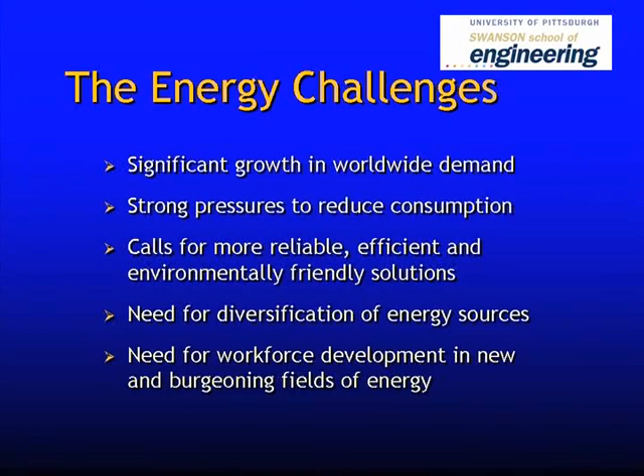There's calls for more reliable and friendly solutions for generating energy, and there's going to be tremendous strides made in reducing the energy consumption in various entities through green buildings and electrical production efficiencies and transportation efficiencies. And there'll be new energy sources developed, such as wind power and solar power. So there's a lot of challenges, and the gas from shale is going to be one of the solutions to the challenges that exist.

This just shows the energy consumption throughout the world, and you can see that fossil fuels, that's coal, gas, and oil, will continue to be the dominant source of energy for the next 30 to 100 years. And these are the projections that the federal government has put out of what the consumption will be. And this is after all of the efficiencies that are generated are taken into account. So it's not what will happen if we don't do anything. This is what will happen if we really focus on developing optimal energy use.

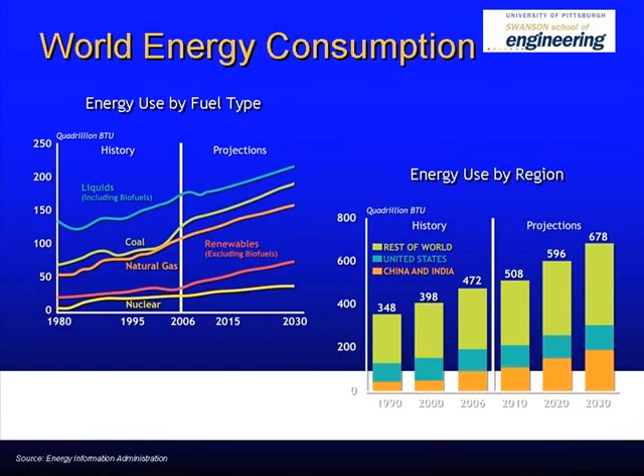And you can see where the demand is coming. China and India are resulting in big increases. The rest of the world is going to demand more and more energy, and so it's a very important factor of why shale gas is important.

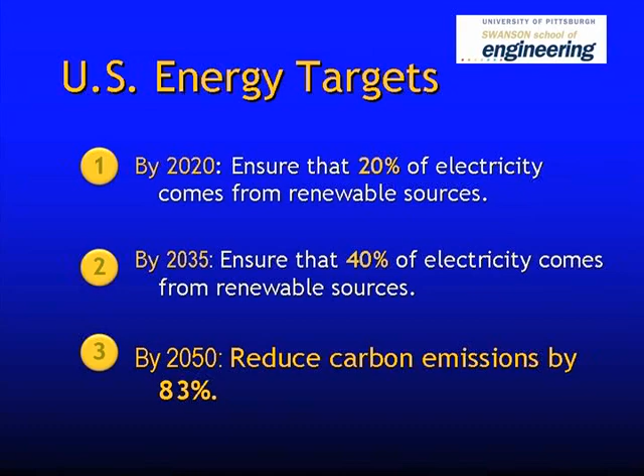And if you look, one of the U.S. energy targets is to reduce carbon emissions by 83%. So if you recall what John said, when you burn methane as opposed to coal or oil, you have a dramatic reduction in the carbon emissions, because as a fuel, methane has much less carbon per unit of energy than the other two. So that is why there's a desire, when you're going to use fossil fuels, to use natural gas in preference to the others.

Now, there's other factors that make things desirable, like convenience. Using natural gas in cars is not that great right now because of many issues, and the cost of coal is much less than other fuels. But the goal that's set by 2050 is 83% reduction.

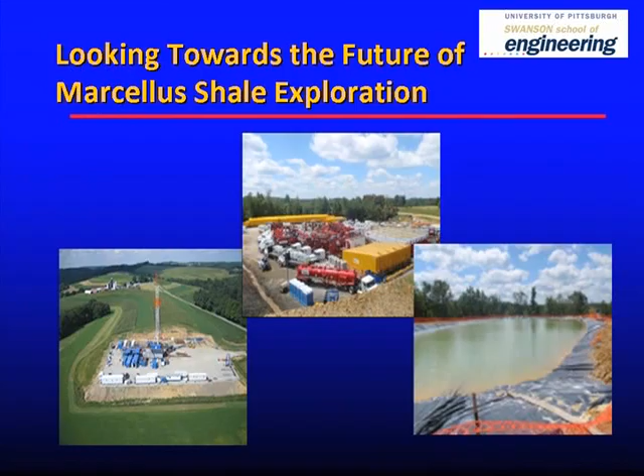So this is a Marcellus Shale exploration and drilling site, just showing you some of the issues. You can look at this, the impact of the site itself, the presence of trucks, the water issues. All of these will be discussed during the presentations this afternoon.

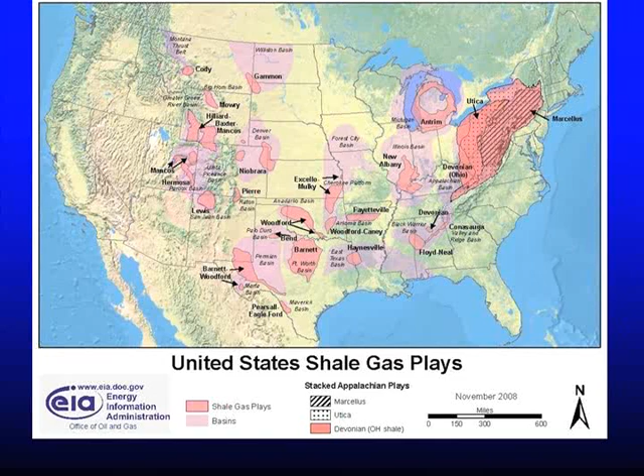Here's where shale gas is. These are called shale gas plays. You can see there are many across the United States, but the most significant that's contributing today is the Marcellus Shale, which is basically, the way I describe it, centered in Pennsylvania and extending around to the surrounding states, but it's a large site.

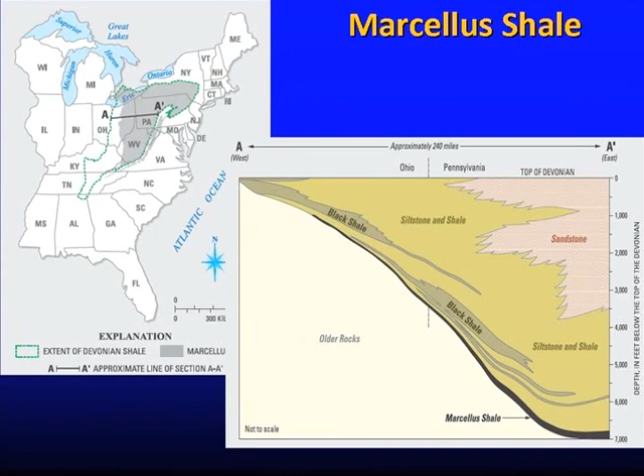And underneath the Marcellus Shale is something called the Utica Shale, which has not been developed at all as of yet. And you can see this is the Ohio-Pennsylvania border, and you can see the Marcellus Shale. It's thicker as you get more into Pennsylvania and thinner, but more shallow as you go towards Ohio. And this is what's being developed for natural gas, particularly in Pennsylvania.

And you can see the various depths, how the depth changes. The depth of the Marcellus Shale base is 2,000 to 3,000 feet on the northern side, and then as you go south, it gets deeper and deeper up to about 9,000 feet. And one of the reasons this is significant is because the aquifers that are associated with the shale, and which have been of concern, are usually at dramatically different depths. And I think you'll hear a little bit more about that.

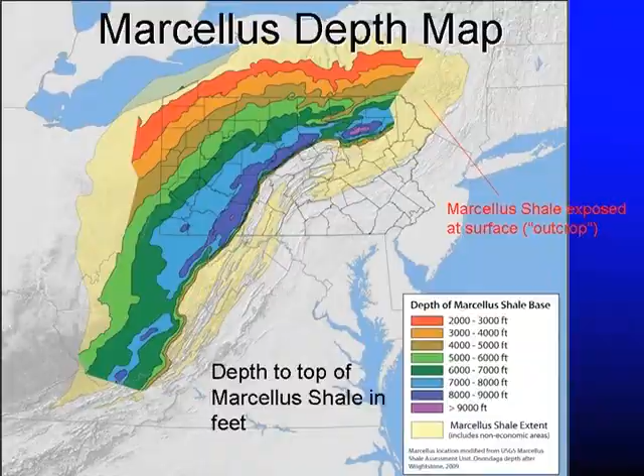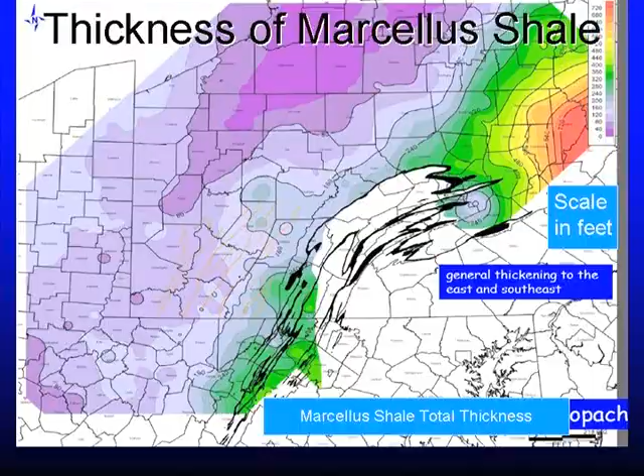So we're going to hear about the specific technology of production of gas from Marcellus Shale. So I'm not going to go into a lot of detail, but I'll give an overview of what's going on. Basically, it's a site where wells are drilled down into the shale, and then you have to fracture the shale in order to get the gas to come out, which means you turn it from impermeable rock into permeable rock by hydraulic fracturing. Then gas will flow back up, and it'll be produced like gas is in any natural gas well.

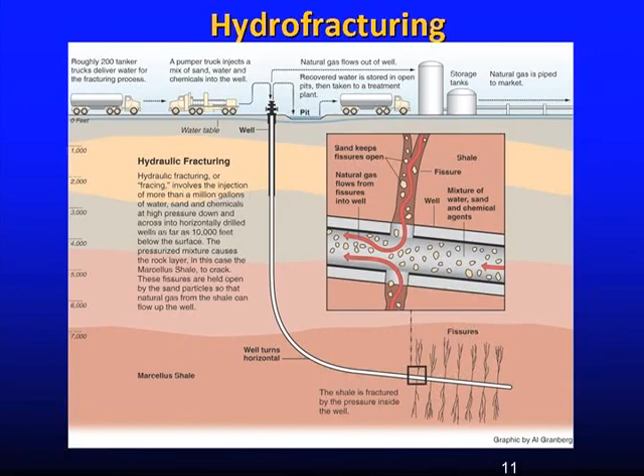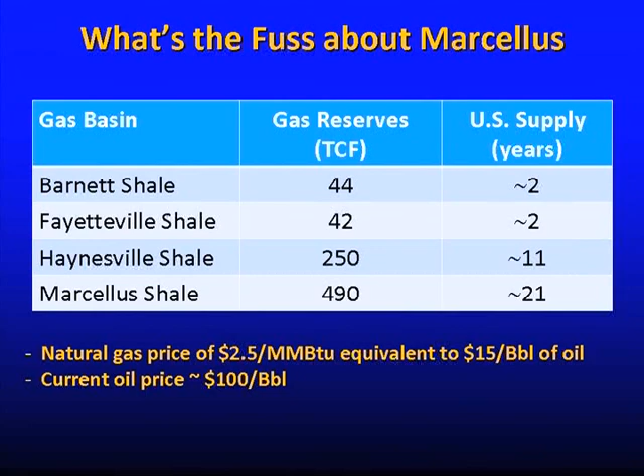The main reason why Marcellus shale gas is so important is not only because methane is an environmentally friendly fuel compared to others, but that it's a huge amount of gas. It's estimated at 490 trillion cubic feet. That's a 21-year supply of the U.S. demand. So it has a huge potential to meet the needs of Pennsylvania, which can become the second largest gas producing state in the nation behind Texas. Now I think it's about 15th.

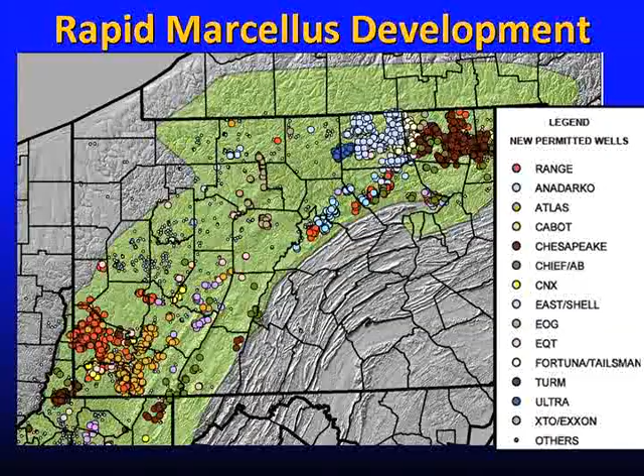So it has a chance for that, but also it will lower the price of energy, and it will impact the economy in the regions where the gas is produced. And I'm going to talk a little bit more about that. Here you can see the permitted wells in Pennsylvania. There's a lot of discussion about should we be permitting wells or not, but the truth is there's thousands of wells permitted. They're producing lots of gas, and a lot of people are employed because of the Marcellus shale gas.

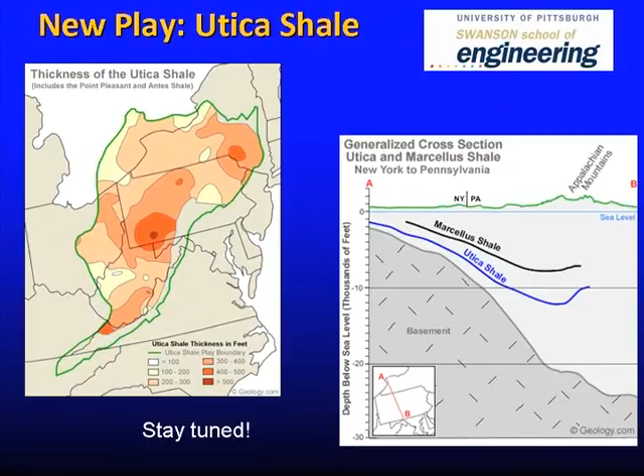And as I mentioned, the Utica Shale, which is another shale play underneath the Marcellus Shale, is even bigger and potentially contains more gas. And so if this is produced, it could have an even bigger impact than Marcellus Shale, but we'll have to stay tuned to see what happens there. I think by the time they get to Utica Shale, some of the issues associated with hydrofracking and disposal of water and so forth will have been addressed.

What are the water issues? We'll hear about that. The water issues are that you need 3 to 7 million gallons of water for hydrofracking. So that's a lot of water. You're withdrawing water from the surface, so you're consuming water from a river or stream. The water contains a lot of additives when you inject it, and it contains even more minerals and things when it's produced.

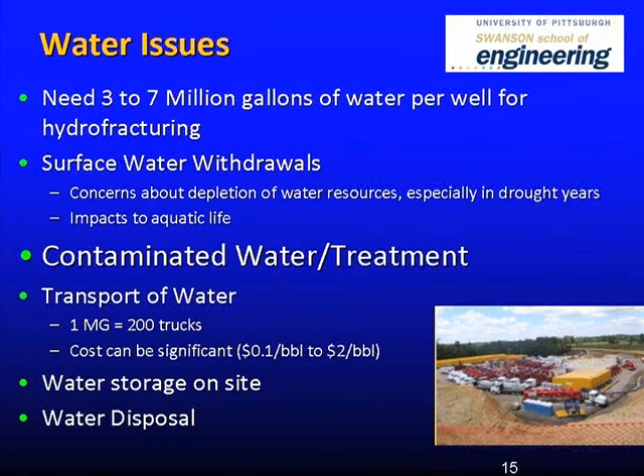So it's an environmental issue, and you have to learn how to deal with the problems associated with the environment. You have to transport the water, so it requires trucks and movement of trucks across roads in the region of the wells. And you have water storage issues on site. How do you store water on site? Because you need millions of gallons. You have to have a way of storing it, and you have to protect the environment around there and restore the environment once you're finished.

And then water disposal. At some point in the Marcellus shale cycle of hydrofracking and drilling, you have to worry about what you're going to do with the residual water, and that's a disposal issue. So I'm not going to talk about all of these, just to mention that's one of the things that's affecting Marcellus shale. I just have one slide that addresses one of these issues just for illustrative purposes.

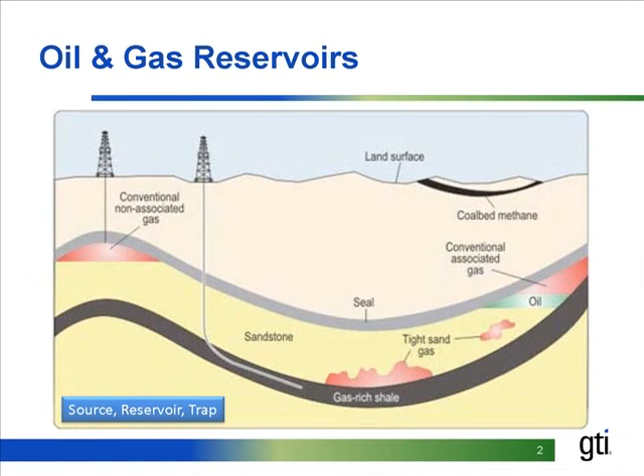So the reservoirs that I mentioned, the beach sand reservoirs, which are the Saudi reservoirs or the Gulf of Mexico, are these right here. And these reservoirs are really drying up really fast. There isn't very much of what's called easy oil and easy gas. So there's a need now to extract gas from these gas-rich shales. All the hydrocarbons that you find in these nice, clean sand reservoirs are all generated in these gas-rich shales.

And because the porosity in these gas-rich shales is so low, you actually have to expose a lot more of the rock to the wellbore in order to produce the gas or the oil or whatever hydrocarbon in economic quantities, whereas these other conventional reservoirs are much easier to produce. And the biggest difference between the gas-rich shale and the conventional reservoir is that it is the source of the hydrocarbon, it's the reservoir that is holding the hydrocarbon, and also it's a trap. So you have all three phases that occur in a shale.

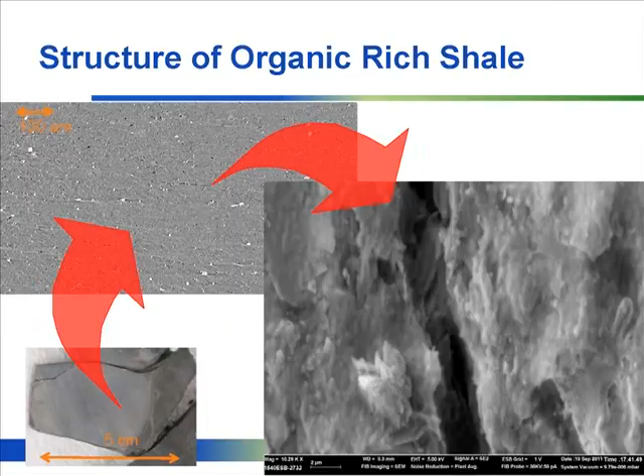When you zoom in to a scale of about 100 microns, you start seeing there are little discontinuities in the shale. You start seeing different minerals and different things happening. And when you zoom into this little fine hairline crack there, on a scale of about 2 microns, you can actually see that, in fact, this shale does have porosity. It does have some fine hair-like fractures, and this is where actually the hydrocarbons are contained.

Again, it's not very much pore space to house the hydrocarbons. That's why so much shale has to be exposed, and that's why hydraulic fracturing is needed to break apart the shale and create more of these fissures and fractures to let the gas out of these pore spaces that have little or no conductivity.

In addition to being a very tight rock, there are 2 different flow mechanisms in a shale that allow the hydrocarbons to flow out. Methane is stored in shales in 2 ways. One, it's encased in the porosity, and 2, because this organic rich shale has organic matter, the methane molecules are actually adsorbed to the organic matter of the shale.

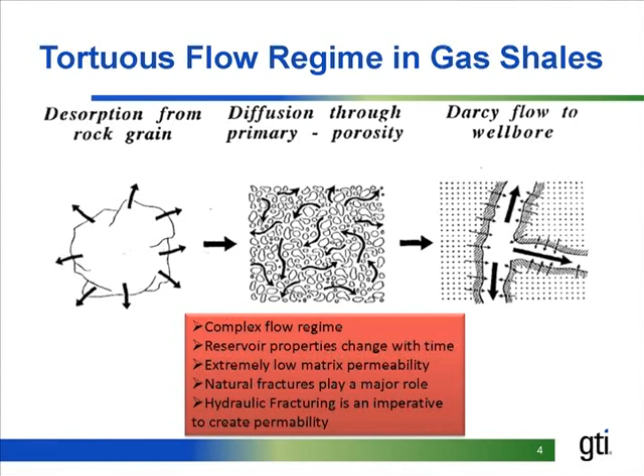And the only way to get the methane that's adsorbed to the organic matter from the shale to flow out is you have to reduce the pressure. So once you desorb the methane from the organic material, it goes into the porosity, and then it goes into these fractures that you created through hydraulic fracturing, and into the wellbore.

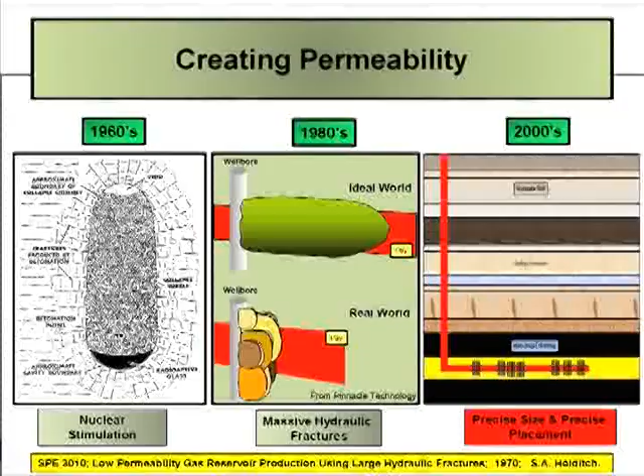But there has to be some kind of synthetic permeability that's created in order for these things to flow. And this is where hydraulic fracturing comes in. And hydraulic fracturing is based on creating permeability. Creating permeability in these reservoirs is not really new. It's actually been around for a very long time.

In the 60s, the government and industry experimented with nuclear detonation to create permeability. They would actually convey a nuclear bomb of some smaller scale, detonate the bomb, and see if there's any hydrocarbons that were trapped in the rock that would come out. Well, it didn't work. The rock was destroyed, it created glass, and in the end, you had to deal with radioactive material.

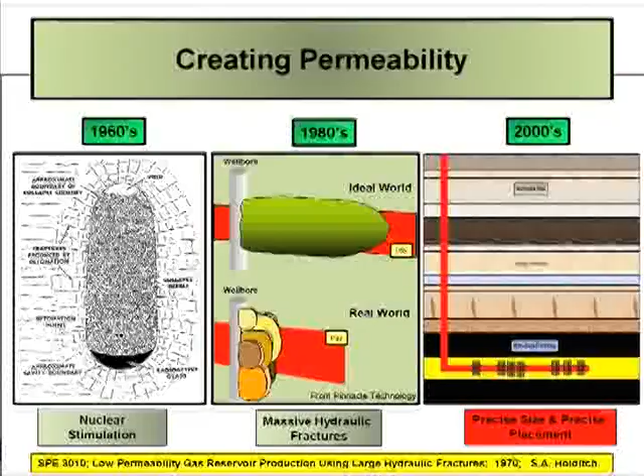In the 80s, these massive hydraulic stimulation treatments were thought to be the ideal way to go about releasing the gas from the rock. And in the real world, it turned out that these massive treatments didn't really extend out as far into the rock as we thought. Instead, what happened is that a lot of these little smaller fractures were created, and it didn't stimulate the reservoir, the hydrocarbons, very effectively.

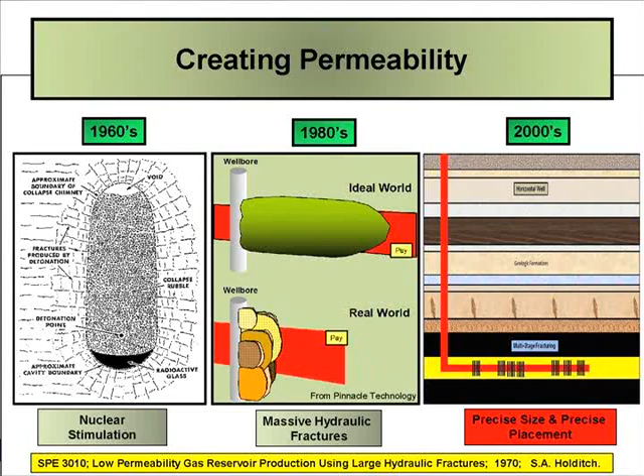And this is where horizontal wells and hydraulic fracturing are making a difference now, and for the last 10 years, actually. So what you have is a horizontal well in the formation that contains the hydrocarbon, and you fracture stimulate this horizontal well a few times, and you break the rock apart, hence you get gas out of the rock that normally wouldn't flow gas.

Here's a quick timeline on hydraulic fracturing. This technology is actually fairly old. It's been around since the 1940s. The first one was in the Hugoton field. And the volumes were really small back then, around 1,000 gallons of fluid. As it evolved in the 50s, 60s, by 1965, there were 400,000 treatments executed. By 1975, there were about half a million, and so on.

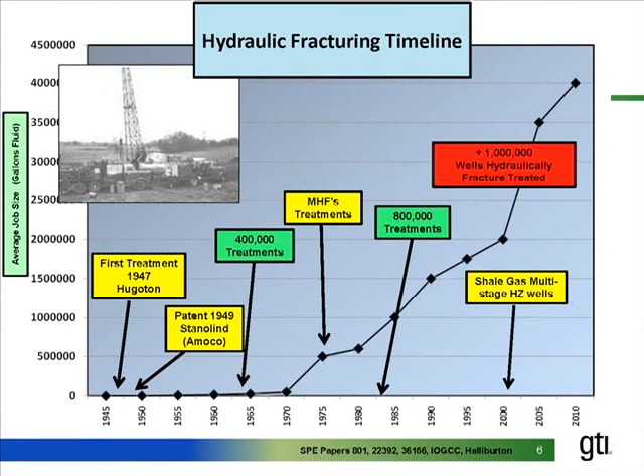In the early 2000s, with the development of the Barnett Shale in the Fort Worth, Dallas area, this is where the horizontal wells with multi-stage hydraulic fracturing really took off, and the volume of the fracturing treatments really increased. And nowadays we have over 1 million wells that have been fracture stimulated. And if you think about it, each well sometimes can have up to 20 or 30 fracture treatments. So there have been plenty of hydraulic fracture treatments that have been already executed.

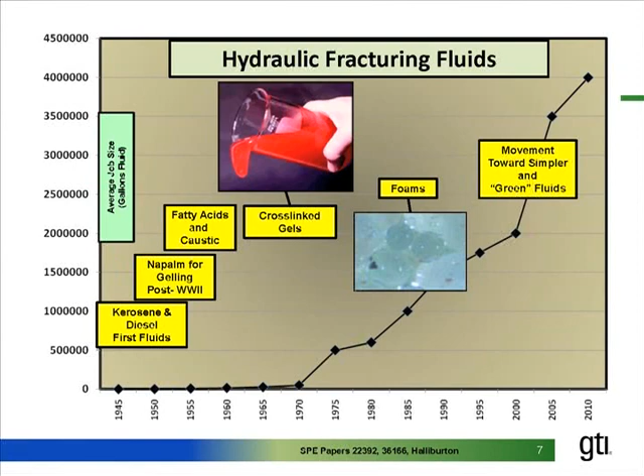So again, the point is that this technology is not new. It's been around for a long time, but it's been evolving over the years to make it what it is now. The hydraulic fracturing fluids that were used initially were kerosene and diesel fluids, then progressed to napalm, fatty acids, and caustic. And it wasn't until the crosslinked gels came out about 1970 that hydraulic fracturing became what it is now. The reason for the crosslinked gels: you take a base fluid like water, you add a gelling agent that viscosifies the fluid, and then you're able to put in a propping agent.

This propping agent is what actually keeps these microfractures that you create open. So once you pump the hydraulic fracture, you put something in there like a sand or a synthetic material, and then once the well begins to produce gas, the fractures that you created now close on the propping agent and stay open.

And as fracturing evolved, the fluids became cleaner, more refined, more fit for purpose, and the fluids nowadays used for fracturing in these shales are really, really green. And what I mean by green is that most of the additives that are put into these fracturing fluids are contained in all the household products that you can think of.

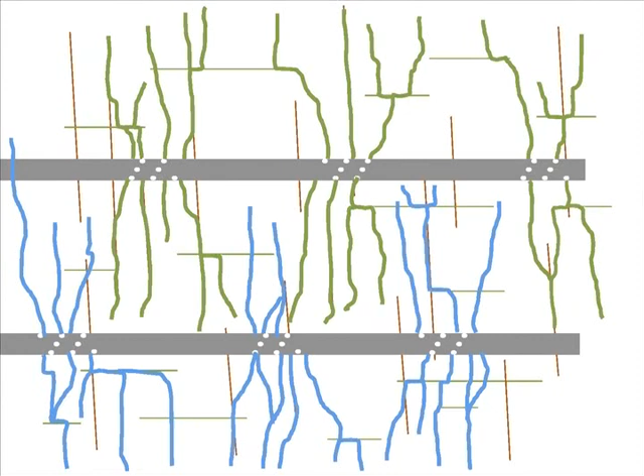So I made this animation to try to visualize what these hydraulic fractures are doing relative to what else is going on in the formation. So what you see here is a plan view looking from the top on 2 horizontal wellbores that are parallel. These brown and green lines are natural fractures that are already in the rock. For the most part, every rock has some kind of a natural fracture in there that's been created through tectonic movements and changes in stress.

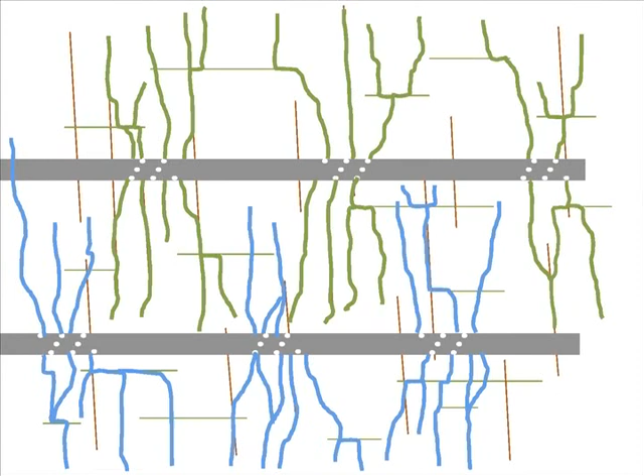So as we pump these hydraulic fractures, let's say in this first wellbore up here, the fluid goes out of these perforations that I just showed you. These hydraulic fractures connect up with the natural fractures, and now you have this network of, for lack of a better word, shattered rock, where the rock previously was a solid piece that nothing would flow through.

And then this is a little bit more advanced concept in fracturing, but there's also a way where you can actually optimize these treatments if you do what's called a zipper frac. So if you frac the first wellbore, you induce these hydraulic fractures. There's actually a stress field that changes, and then when you fracture the second well, the fractures that are generated should not come in contact with these first fractures, and therefore you should get pretty good coverage of the rock and stimulate the entire rock mass that you're trying to extract the hydrocarbons from. How far apart would those be? 500 feet, 1,000 feet.

Let me give you a little bit of background on the current project that I'm working on in the Marcellus Shale. We have what's called a 7-well pad, and we have 7 horizontal wells that are drilled, of course, side by side, and these wells are drilled from a single pad. So the pad is no bigger than maybe an acre of land, I guess, once it's all said and done. So the wells are drilled from a central location.

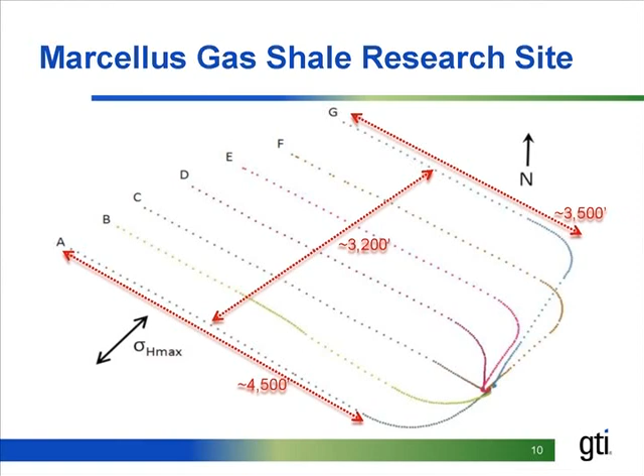The spacing in these wells is about 500 feet apart. This is a plan view, of course. The depth of these wells is about 6,500 feet, and you can see the length of the laterals, with this one being about 4,500 feet to about 3,500 feet. So these wells actually go out really far laterally. It's pretty amazing that they're able to drill a lateral well that far out.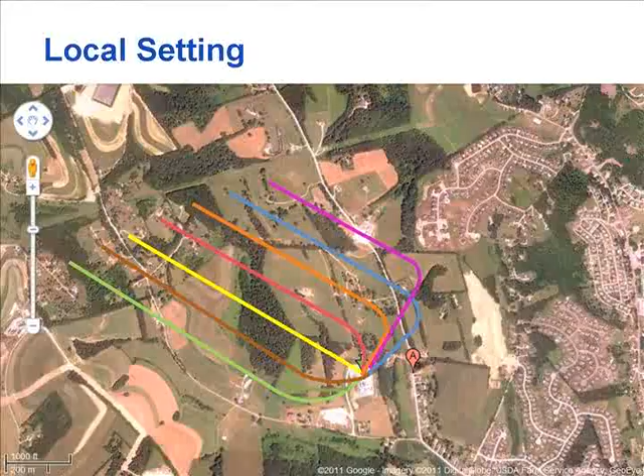What's more important about this is the setting of where these wells are at. This is actual, to scale, a plan view of the wells overlaid on top of the local setting. This is in a rural, very populated area. It's actually a little bit hilly, and it's very important that the environment and the people and the quality of life is taken into account when developing these wells in an area like this. So it made a lot of sense to drill these wells from a central location to limit the amount of land that's being used and things like that.

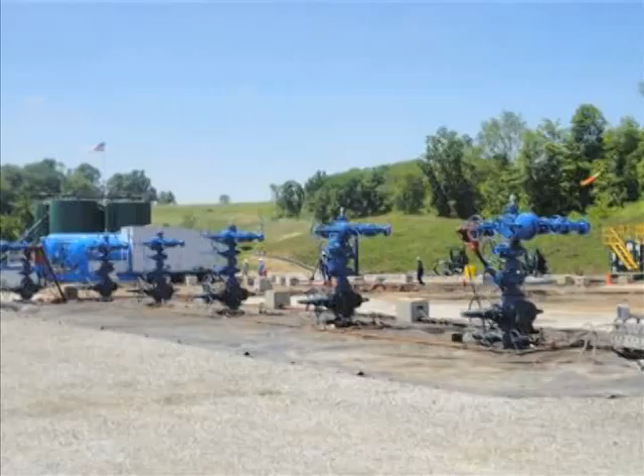So that's what it looks like. And this is actually what the surface looks like. Again, what you see are the well heads. Each one of these is actually a gas well, and there's 7 of them here. So the other option, if you didn't drill these wells at a central pad, would be to drill each well on a separate pad. You would have to build a huge pad to get the drilling rig in there, the water pits and all that. So this actually saves a lot of land and a lot of changes to the environment.

So you might ask yourself, how does the industry know where these hydraulic fractures go? Because we can't see underground. Some of these wells are 3 miles deep in the earth. There's actually a way to monitor which direction and how far these hydraulic fractures go, and it's done with microseismic imaging. Every time you crack a rock, or even when you drop a rock from your hand to the earth, you actually generate an earthquake. Granted, it's a very, very fine earthquake that you can't feel, but there are instruments called geophones or accelerometers that can actually detect these very fine earthquakes.

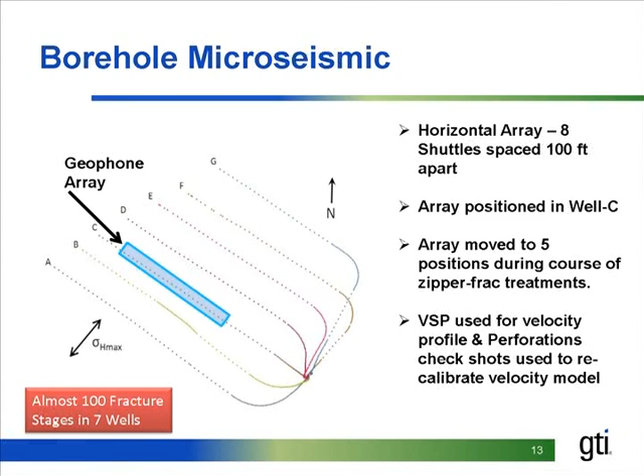And the industry uses those in 2 ways. One, they set up a surface array with these very fine instruments, and as a crack is generated 2 miles under the earth, these instruments can pick up a tiny signal. The other way is to put these geophones in a well bore, like here. So as you're fracking the other wells, there's a listening device in this well bore that picks up where these fractures are going. Here's the example of the surface array, and on this project both have been implemented to get a good feel of where these fractures are going.

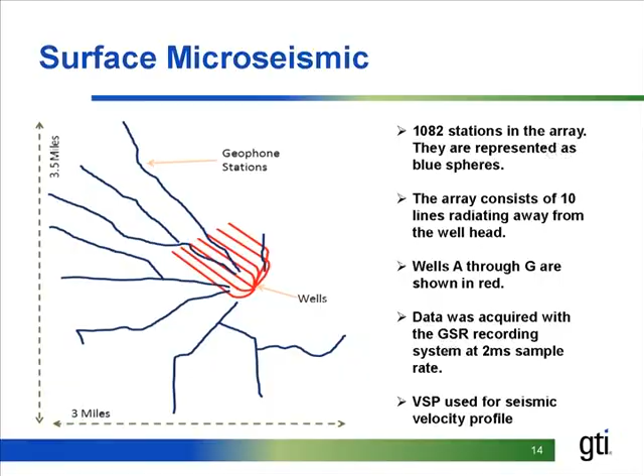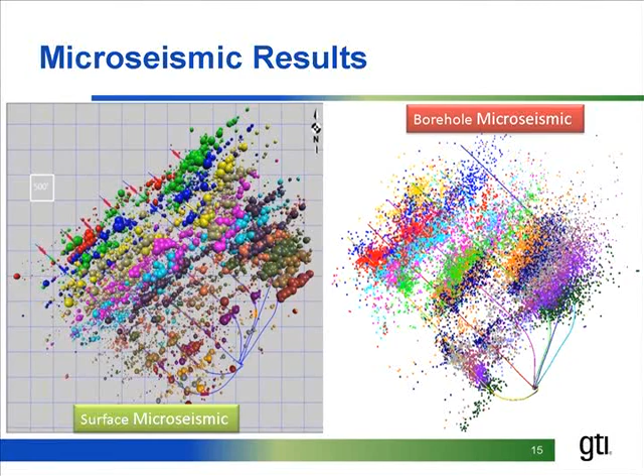Again, here are the 7 wells that I showed you earlier. Here's the array of the surface geophones that extends out from the center of this pad. The array includes over 1,000 accelerometers that are put into the ground that listen for these micro earthquakes to see where this hydraulic fracture goes. Okay. And here is the end result. Each one of these dots is a micro earthquake that shows you where the fracture is going. If I may just take one more minute, I have a movie that I want to show that shows this in real time.

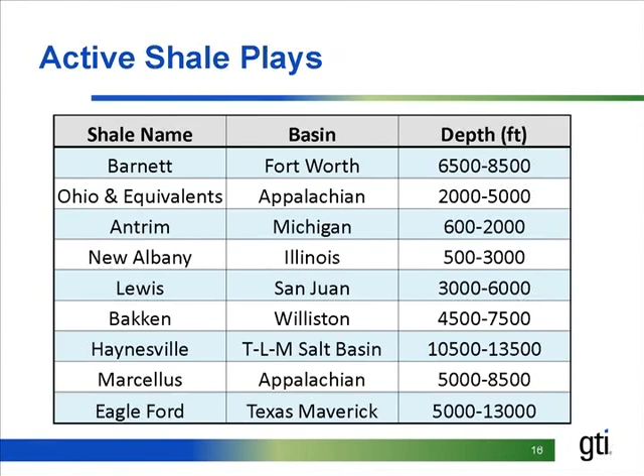Like Dr. Holditch mentioned, these shales are all over the states. They're at different depths in different basins. The Haynesville is one of the deepest ones. The shale is actually between 10,500 and 13,500 feet. There's a New Albany shale here in southern Illinois that's fairly shallow, about 2,500 feet. So the shale is everywhere, and there's a lot of gas there. Okay.

Okay, so here's the 7-well pad, or the 7 wells, and what you see are the hydraulic fractures propagating from this well. So this well right here is being fractured. As the well is being fractured, microseismic events are being generated from the cracking of the rocks, and there are listening devices in this well right here that are picking this up. As you can see, as the well is being fractured, more and more events are being picked up.

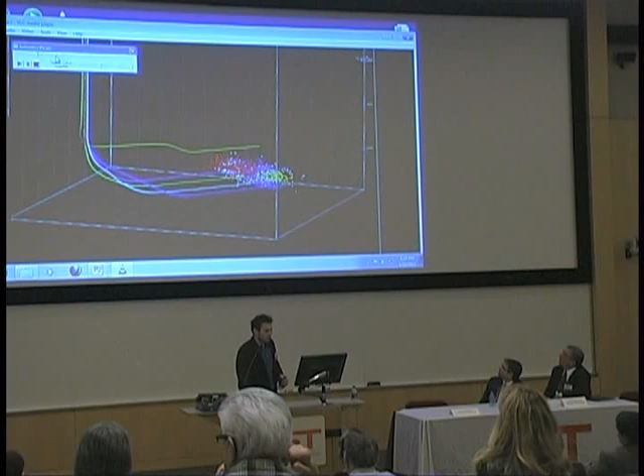And this is actually the permeability that's being created. It's a shattering of this rock that releases the hydrocarbons and provides a path for the hydrocarbons to flow to the wellbore. And when you speed this up a little bit, you'll see more and more of the rock space being stimulated.

Pause right there. So you can actually see how high these fractures propagate. This depth here is 6,500 feet. Here's about 6,000 feet. Here's about 7,000 feet. So these events don't go higher than 500 feet above where they're intended to be.

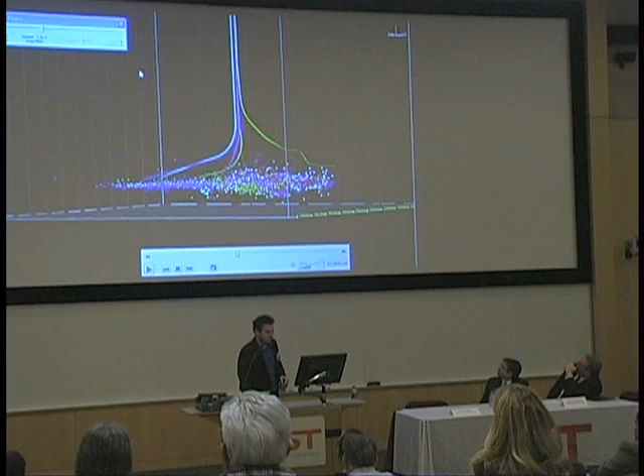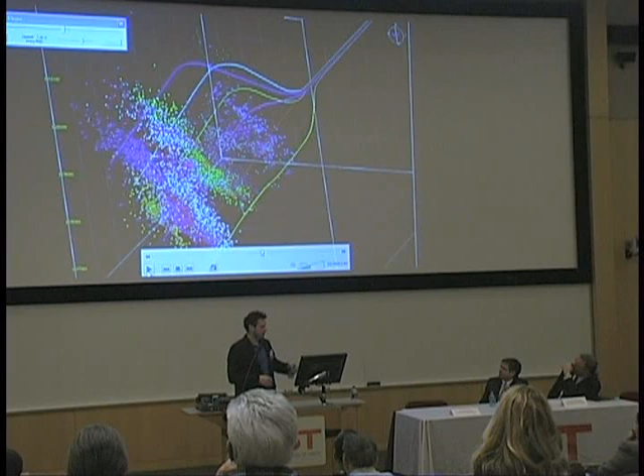Here's the general coverage. And one point I want to make before I hand it over to Trevor. What you see here is that all these wells were fracture stimulated. However, in this area, you see very good coverage of microseismic events, meaning that this area was stimulated really well. Here you see a void.

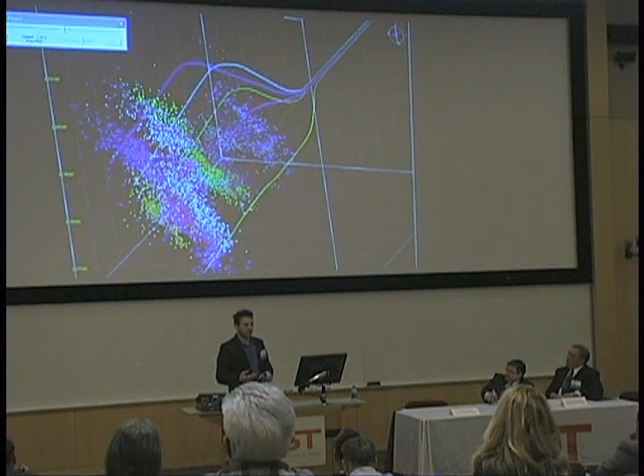And this is actually where a lot of research is needed to understand why some hydraulic fracture treatments are effective and why some aren't. Because if the treatment isn't effective, then you're actually leaving a lot of gas behind in these unstimulated areas here. So that's actually what we're working on right now, trying to understand how this works and how to optimize these fracturing treatments to better utilize the rock that's there and not have to go back in the future and redo it.

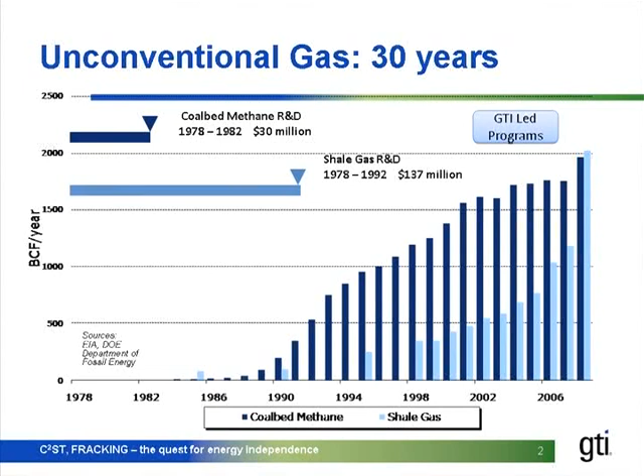So GTI is a 70-year-old organization. We've been working with producers and service companies and technology providers in unconventional gas development for 30 years. And as you can see in this slide, GTI led the early research and development programs in coal bed methane and shale gas in the US from the late 70s to the early 1990s. These were very sizable programs totaling about $170 million. These programs led to the scientific and technological innovation that is utilized by the industry today to make these resources economically producible.

And I think this slide is relevant to what we're talking about today because although the technology for unconventional gas development has been developing for over 30 years, the public and stakeholder communities have only been introduced to this technology very recently. And so what I think is critically important now, if these resources are going to reach their full potential, is the societal acceptance of the technology and the sustainable development of these resources going forward.

But of course, society's reaction to these resources so far has been mixed, to put it lightly. Not everyone's very happy about the development and the increase in shale gas production. There have been numerous objections raised by Oscar-nominated movies such as Gasland, New York Times feature articles on hydraulic fracturing, and local protests from high-profile people like actors like Mark Ruffalo.

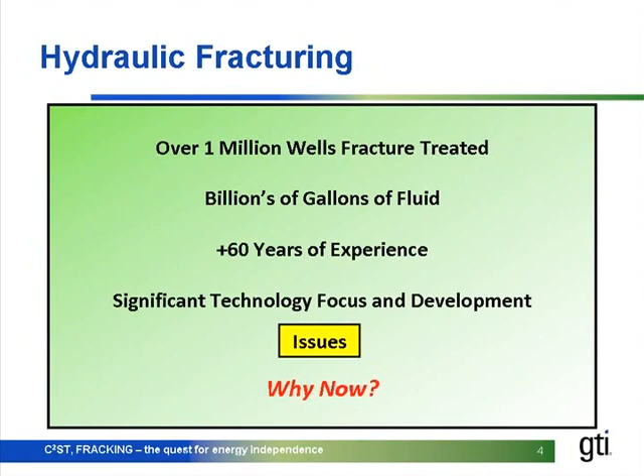But as we heard Jordan and Dr. Holditch talk about, hydraulic fracturing has been applied for over 60 years, and there have been over 1 million hydraulically fractured wells. The industry knows that they can develop these resources responsibly and safely. They know the technologies are proven. They know that unconventional gas has and will continue to provide economic and environmental benefits.

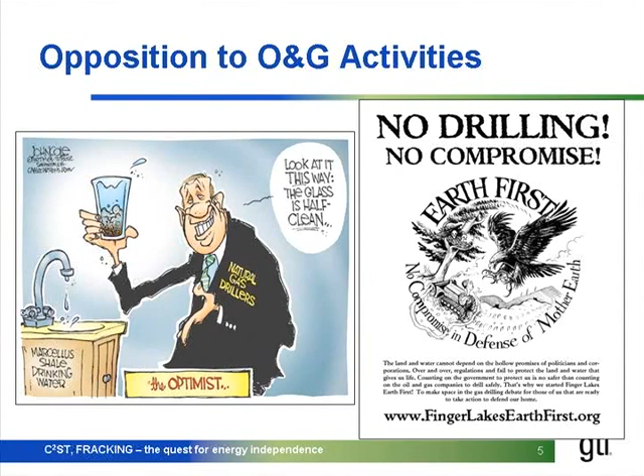But to those outside of the industry, these technologies appear new, they appear novel, untested, and some would say even dangerous. And so a harsh spotlight has been shined on the industry's operating practices. And the industry has been slow to respond with the appropriate information and transparency that I believe provides the needed environmental assurances. And I think it's because of the perceptions of environmental impact and because the technologies have been very disruptive to the energy market, particularly to the further development of renewable energies, that opposition groups have organized campaigns against it.

There's been a lot of emotional rhetoric and accusations generated about the technologies used to develop unconventional gas. And this has resulted in a lot of confusion, and people just don't know what to believe, and they don't know who to trust. They don't want to trust the government, and they don't want to trust the industry. In my view, what enabled the confusion was the lack of information when it was desperately needed very early on in the process.

There was a significant increase in drilling activity closer and closer to where people live and work. And yet, information was not made available about the science behind the technology. Worse still, the industry chose to downplay concerns and to dismiss the concerns of the public. And I think what they should have done is engaged in more authentic listening to understand what the concerns were and to come forward with information that would have been helpful. But in the absence of good, credible information, people are going to make up their own minds.

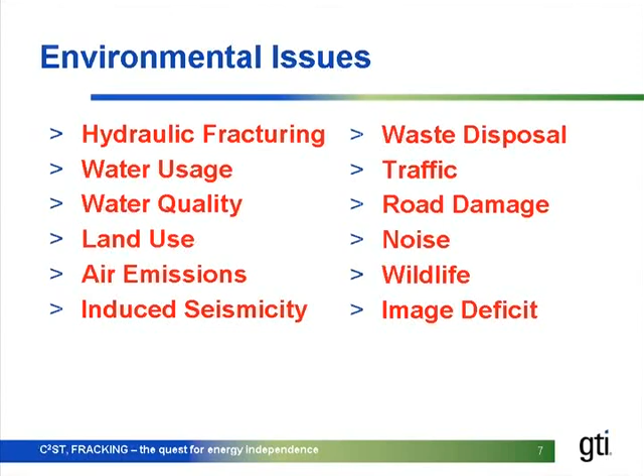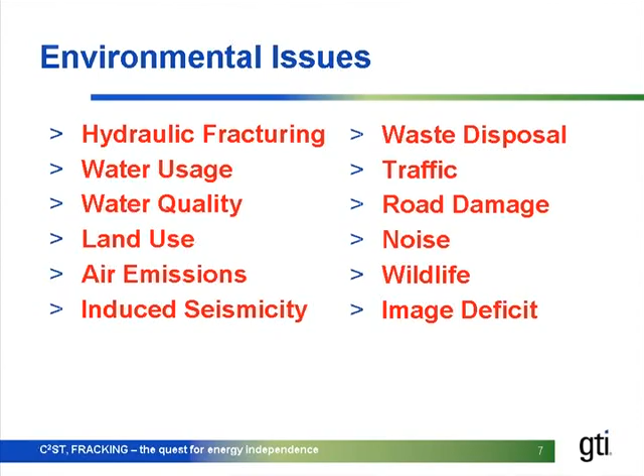So while scientific and technological innovations will continue to play a key role in unconventional gas development, and the economics and the energy security issues are important, I believe it's going to be the environmental issues, both real and perceived, and the acceptance by the general public that will determine the extent to which unconventional gas resources will reach their full potential. Now, hydraulic fracturing and water management are obviously at the core of environmental debate, but it's not just about hydraulic fracturing. There are a number of environmental impacts that the public sees, that include land use, air emissions, induced seismicity, waste disposal, traffic, road damage, noise, wildlife.

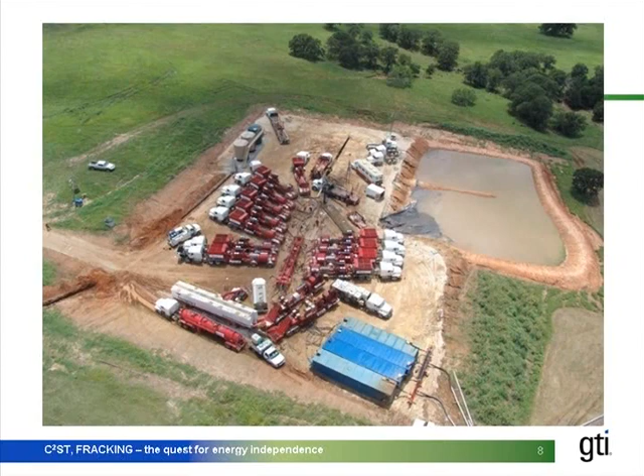And the industry faces what I call an image deficit. People associate natural gas with big oil. And so presenting the facts matters, but I don't think it's enough. It's also about addressing the perception of the industry. And this is what the public sees. They see lots of trucks, they see an industrial process, and they see a lot of water. And then they don't see what happens underground, and so people's imaginations run wild about what might be happening that they can't see.

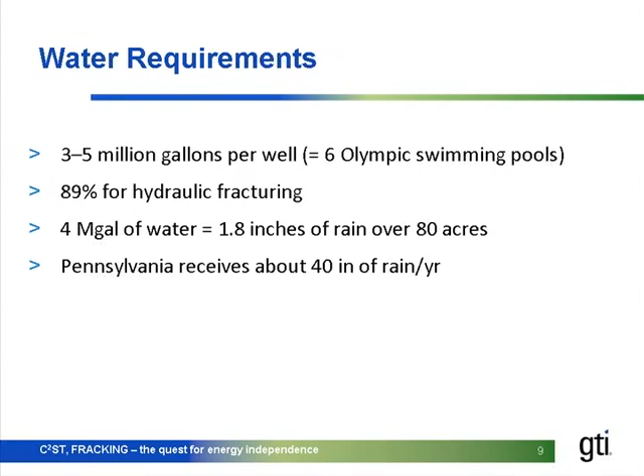And so I want to talk a little bit about the water requirements. Average wells require approximately 3 to 5 million gallons per well in the Barnett and the Marcellus. Just to give you a point of reference, 4 million gallons of water is about 6 Olympic swimming pools of water. So we're talking about a lot of water, but it's also important to put that in context. 4 million gallons of water is approximately 1.8 inches of rain over 80 acres. And Pennsylvania is a state that's water rich. They get about 40 inches of rain per year.

And I have some friends at Consol Energy in Pennsylvania, and they've helped me put the water usage in other contexts. They tell me that New York City, for example, uses 4 million gallons of water in approximately 4 minutes. A 1,000 megawatt coal-fired generation station uses 4 million gallons of water in about 12 hours. A golf course might use 4 million gallons of water in approximately 25 days. And while these represent continuing consumption of water, the water used for gas wells is really a one-time event.

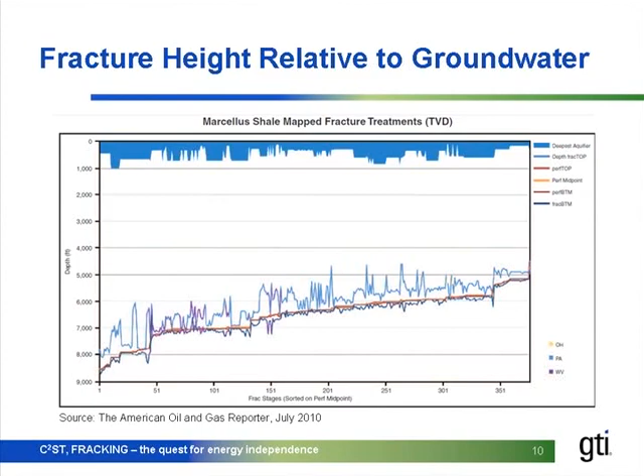And what you see here is a series of hydraulic fractures over a length of distance. And here you can see the distances measured between the freshwater aquifer, which in this case in Pennsylvania is located at depths less than 1,000 feet, and the induced permeability that's created by hydraulic fracturing at depths between 5,000 and 9,000 feet. And this slide also shows the height of the fractures. It shows how unlikely, not impossible, but how unlikely it is that hydraulic fracturing technology itself is a threat to potable groundwater supplies.

What should be the focus, I think, the focus of the scrutiny, should be less about hydraulic fracturing technology, and it should be that the wells are constructed with integrity and that the water is handled properly at the surface. All operators should follow proper well construction standards so that fluids do not find their way from a poorly cemented well into a shallow source of drinking water.

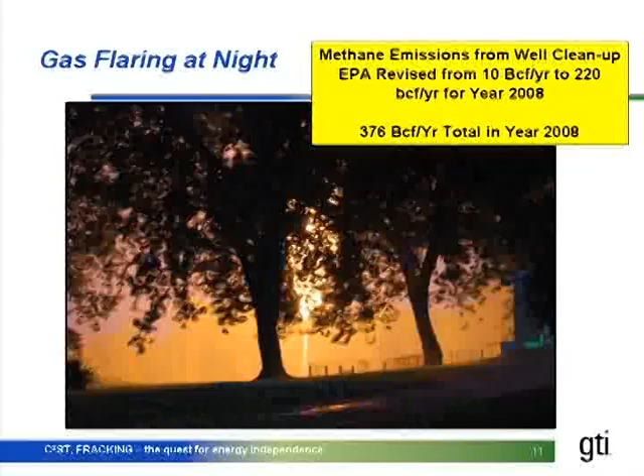Another environmental impact receiving attention right now is methane emissions during natural gas exploration and production activities. Natural gas is a relatively clean fuel that contributes significantly less greenhouse gas emissions per unit of electricity produced than coal. However, recent published reports by the U.S. Environmental Protection Agency and Cornell University brought this benefit for gas into question when they indicated that upstream methane emissions are increasing due to well drilling, testing, and completion procedures.

Because methane is a much more potent greenhouse gas than carbon dioxide, methane that leaks or is purposely vented into the atmosphere is more harmful than the carbon dioxide that is produced when methane is flared on site or burned in its use. However, reviews of these reports by GTI and MIT and Carnegie Mellon have all identified flaws in the EPA and Cornell reports. In fact, even Cornell University came out this week and concluded that the greenhouse gas footprint of shale gas is much lower than that of coal.

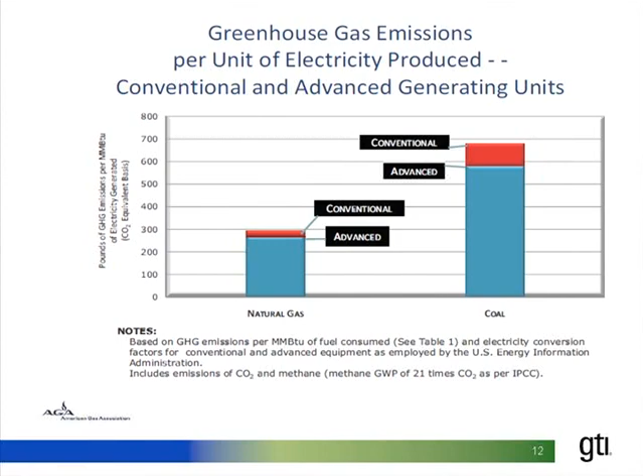The Carnegie Mellon study focused specifically on the Marcellus Shale and found that the shale gas is much cleaner than coal by 20 to 50%, depending on the plant efficiencies and natural gas emissions. And this matches the comparison shown here as provided by the American Gas Association. It's noteworthy to recognize that the Carnegie Mellon study was reviewed prior to publication by the Sierra Club.

And most recently, there are questions about earthquakes, possibly tied to hydraulic fracturing or deep wastewater injection wells. And I'd be happy to talk more about this in the Q&A rather than spend time here. It's a scientific debate that's ongoing right now.

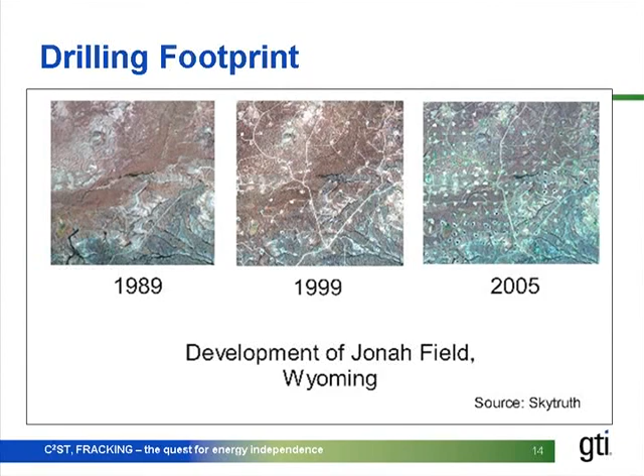And I think I'd like to highlight real quickly another very important environmental issue, and that's the drilling footprint. People see the consumption of land for drilling, and this is an example of gas farming operations in Wyoming. And with images like this, you can understand why people in more densely populated areas like Pennsylvania and in places in Europe might be alarmed.

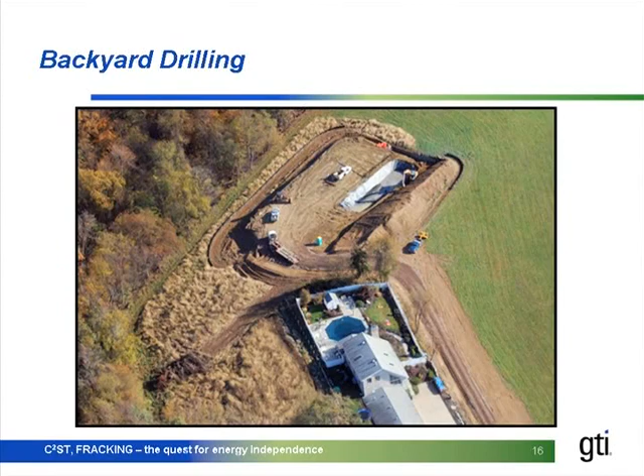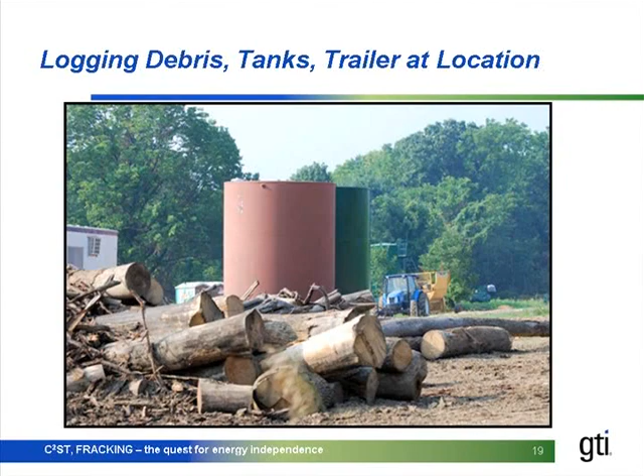Reducing footprint is a focus of operators, and there's an economic incentive for operators to get more gas with less footprint, more revenue, and less cost. An example is the use of multiple wells off a single pad and other steps that allow us to farm these resources and get more of the resource at the surface. The progress has really been amazing. From only being able to access about 502 acres of energy resources per well in 1970 to being able to access over 32,000 acres of energy resources per well pad today.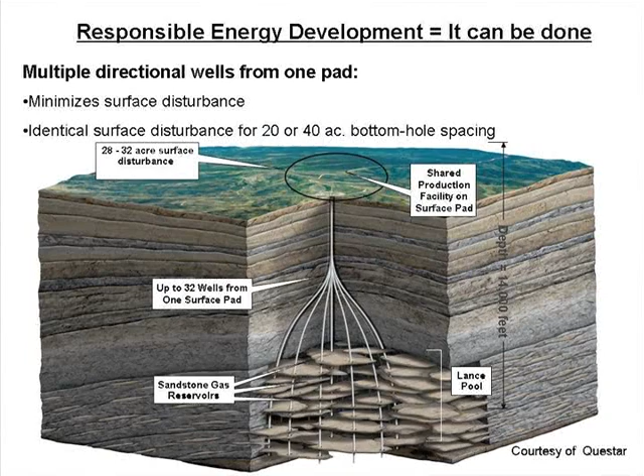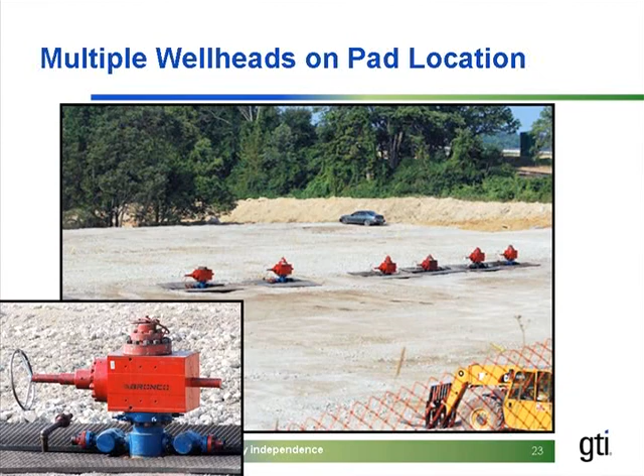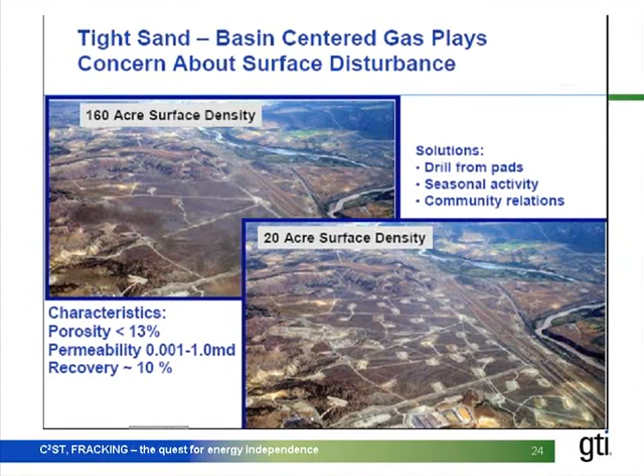This is what it looks like at the surface after drilling. Multiple wellheads located on a single pad. This well pad might be about 1/4 of an acre in size. Greater use of pad drilling with more and more wells on a single pad allows us to move from the example on the right, where we might have 20-acre spacing between well pads, to something more like the left, where we would get 160 acres spacing between well pads.

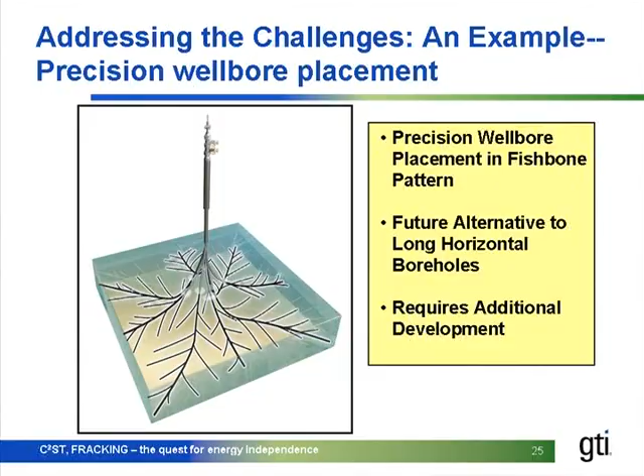Right now, with existing technology, as I said, we're only getting 10 to 30% of the gas out of the ground. And over time, we might be able to extend the supply of the gas produced and minimize the environmental footprint even further. The vision is to try to mimic nature as much as possible, using something like a tree root drilling system to extract gas in much the same way that tree roots extract water from the ground, where multiple lateral wells and multiple fingers of wells are drilled from a single hole in the ground.

And as I said, facts alone may not be enough. It takes a combination of many things. And I'll just close with this slide. These are a number of examples of work that GTI is involved in to help increase the economic and environmental sustainability of these resources. So thank you.

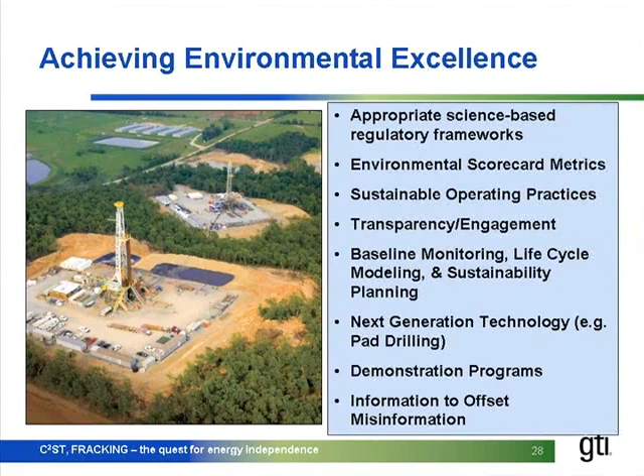Dimitri? I have a question. How do you estimate the production rates of this shale gas? Because if they're correct, the energy picture is going to change in Europe because the production rates are so huge. Are you using any kind of models like Darcy Law or more advanced models? Because we do have a two-phase flow problem.

And as you know, BP underestimated the oil spill into the Gulf by at least an order of magnitude. Even now, there's a question of what kind of models to use. We do have the two-phase flow models, so I'm just wondering, first of all, how do you estimate? Is it just a guess, these production numbers, or are they based on some permeability estimates and Darcy Law? Could you repeat the question, or the essence of the question?

Yeah, sure. The question was, how do we estimate natural gas production from these shale reservoirs? Well, in general, and you hit this right on the head, these reservoirs are really complex. You have a lot of different things that are going on. They're very heterogeneous. There are different flow mechanisms. Of course, one is diffusion, then there's Darcy flow to go to the wellbore. So they're very complex reservoirs.